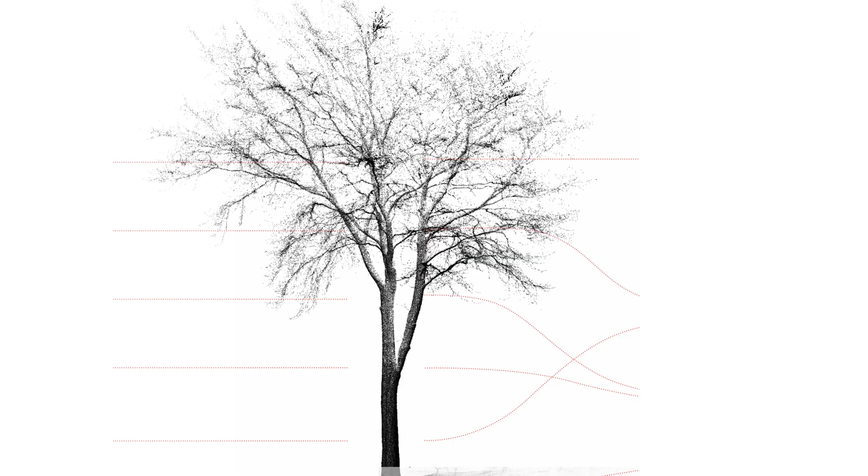There are two strands of research happening at Hooke Park. One is focusing on natural geometries. We're kind of in love with these really exciting curvatures and anomalies for timber production. Timber production doesn't know what to do with these fork geometries, but we know from an engineering point of view they're the strongest part of the tree.

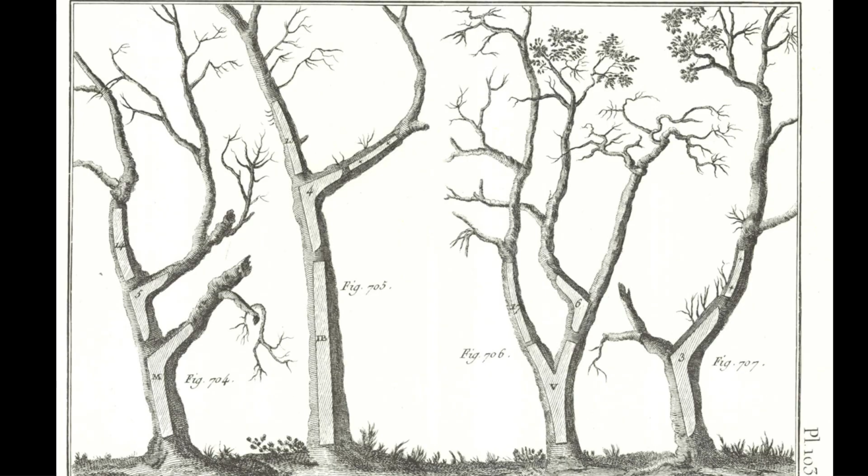This is not a practice that we invented. This is an image from an encyclopedia from 1700. Back in the days, people would go out with a jig and look for a specific bit of tree when they were building a boat, a house, or a cathedral.

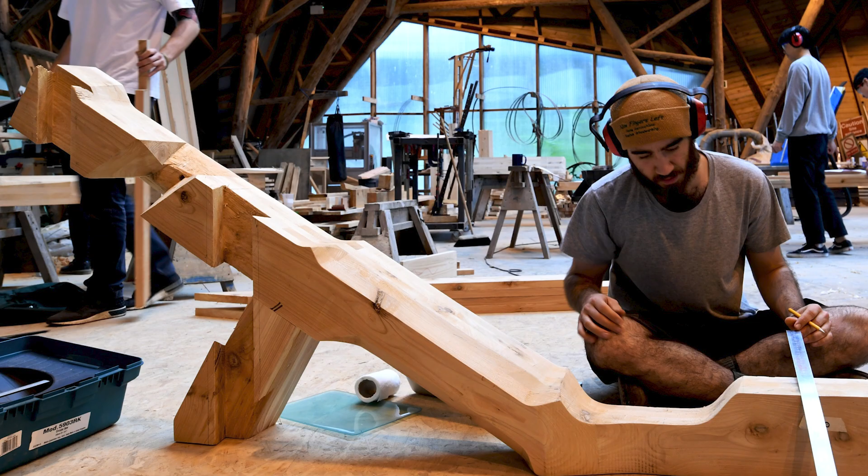Hooke Park is a laboratory, and we are interested in every part of the tree, from the root plates all the way to the crown timber, and we will find applications for that. This tacit engagement with the material is very important to get hands-on and actually learn from it, learn from its structure. We learn through making, we learn through physical production.

So one side is natural geometry, the other part is engineered timber. Practices like glulam and CLT, cross-laminated timber, mean that you can reconfigure the tree into a specific diagram that aligns with the forces that you need this piece to respond to. These are carefully choreographed recompositions of a tree, so we can make something which is stronger than the original tree.

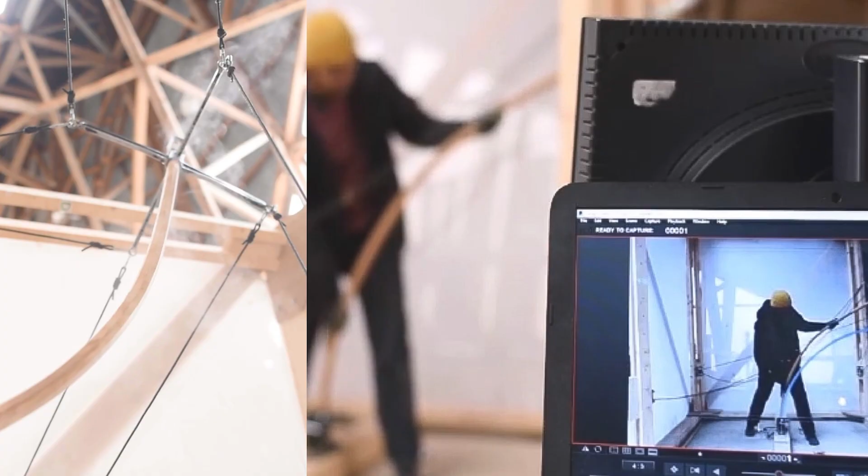We're interested in different ways that we can manipulate timber. This is steam bending, we can expose it to fire and heat to manipulate its shape. In this case, this is pretty much like drawing with timber, right? It's very refined, so you can kind of control its behavior.

Our toolbox is not really extensive, but scanning is very important, and I'm sure Thomas will point this out and you will have done exercises. Photogrammetry - really, this method is a connective tissue between the digital and the physical realm. It means that we can develop libraries of these natural geometries that we can then work with and develop.

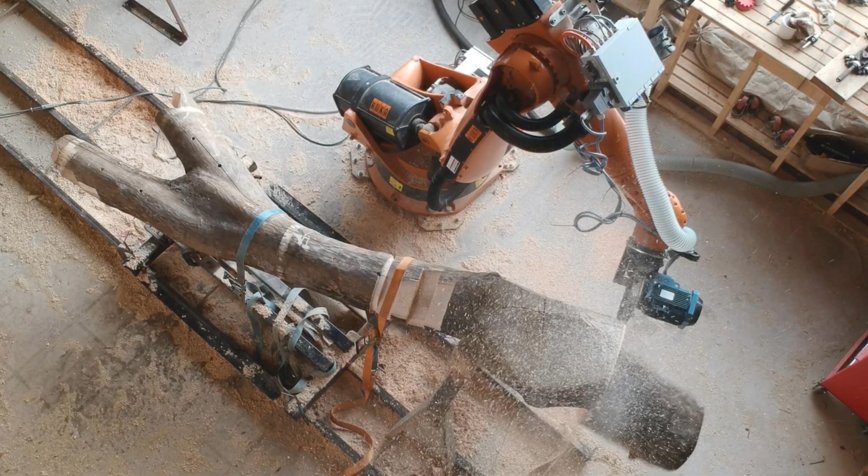The other bit of kit which is really important is this young lady - this is Latoya, the 6-axis robot. KRC2 C150, so she was born in 1996, very much last century, probably a lot older than you guys over there in the lecture hall. But she allows us to operate with surgical precision on the natural geometry, so she's very important.

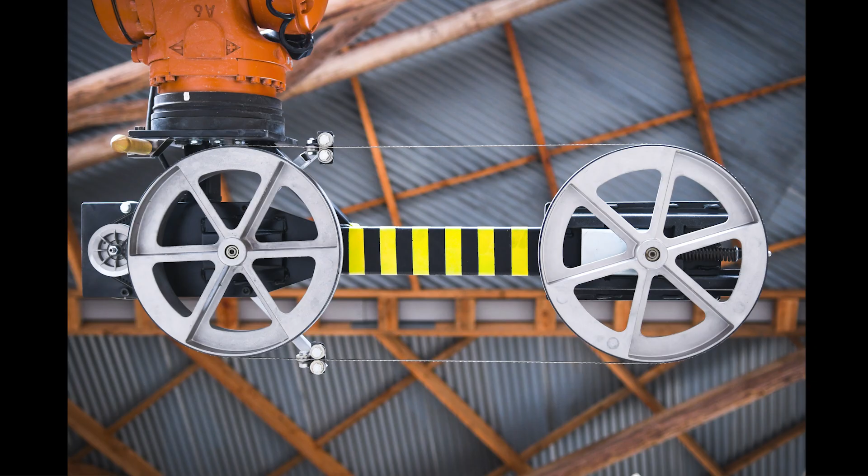The final piece which is really important for us is the ability to make our own tools. The bandsaw you are looking at is not something you can buy off the shelves. We buy bandsaws off eBay and we reconfigure them. This bandsaw is generation 2, and this is generation 3. We optimize and learn from the tool. This is pretty much the holy grail in the world of making and fabrication, if you can make your own tools.

It's a large part of my research to develop new robotic applications every year. This is by far the scariest tool we ever attached onto a robot - a circular saw that rotates at 25,000 revs, a pretty evil tool. But I try to develop a new one every year, and when we have a new tool, we try to get some bright minds from across the globe to come and play with it, and then we make little films like this to try and introduce people to it.

And what it allows us, sorry. I thought someone was saying something.

I like this image just because it really illustrates the juxtaposition between really precise junctions and connections and the power of leaving these natural geometries intact as much as we can. And it allows us to build crazy structures like this.

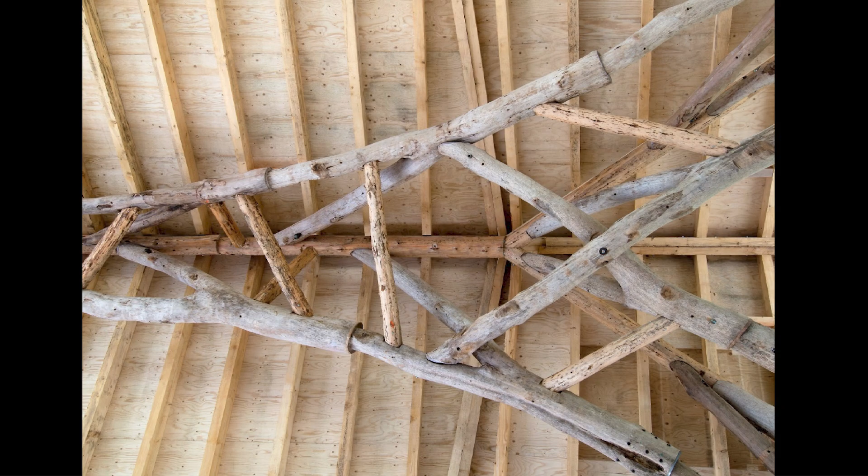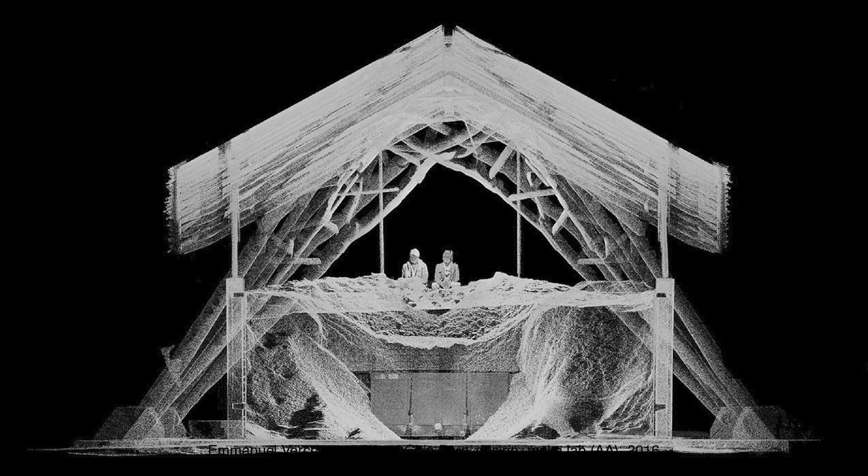And it's really important to understand why we do this. First of all, it reduces the embodied energy, right? We're just locally operating. But second, and this is probably more important, natural geometries for the same section are about 30% stronger, which means if you cut things into a dimension, like a square, you're actually reducing the strength of it. So these things are really important in the way that we work, where we try to work with the natural geometries as much as possible.

And this just really functions as a little demonstration that we work with all the parts of the tree. So when students join us, they don't necessarily have all the skill or the expertise to work with it. So we use these as kind of developing learning skills. So we gave the students this root plate and we taught a bit of robotics and a bit of CNC. And in the meantime, they made this lovely meeting table where the root plate is the structural system to the table, and there's some poetic notions of this island coming through the tabletop. It's a memory of the root plate.

And then the role of the drawing is really important. The role of the drawing to seduce you to go make. So it's really important to understand how much information do you need from a drawing before you need to hit the workshop. And the workshop is the place where we do all the work pretty much. 90% of the time we need to be in a workshop. And that's where we make all our discoveries.

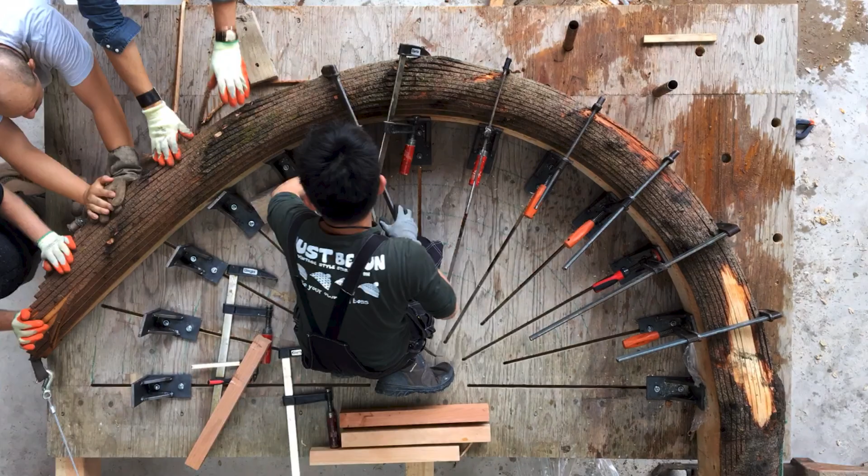And then this is Ankai. You probably have seen him in the earlier movie. We set Ankai the single challenge to steam bend an entire tree. And the reason why I focus on Ankai is because one of the key things that we do at Hooke Park, we ask our students what practice do they want to form when they finish, what knowledge are they after. So the great thing about Ankai is that he is still doing the same thing that he did with us 10 years ago. He's still steam bending entire trees, making these most beautiful constellations.

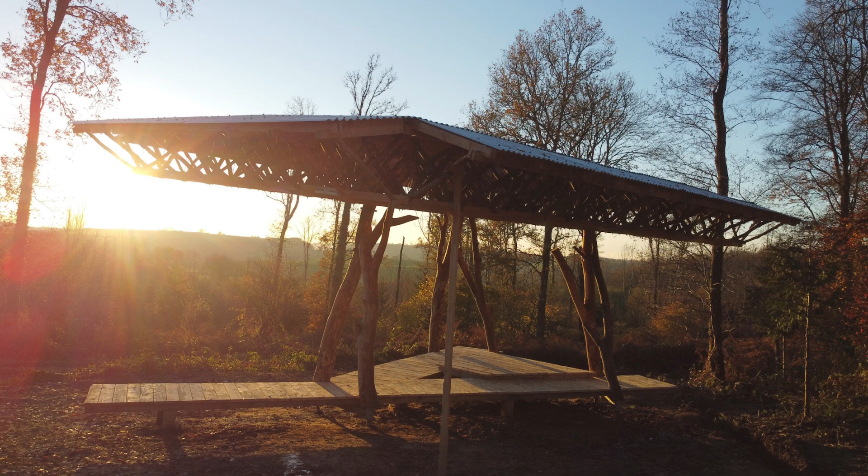I could go on showing work from Ankai, but I want to show you some demonstrations of these principles. So the first one I'm going to talk about is the process that surrounds the field station. So this is working with timber in the round, and then I will also show what we can do with engineered timber. So this is the field station. It sits at the edge of our forest, and it's in a really important location because it overlooks the Mapperton estate. And so this is its site.

And the story of the field station is related to the industrial harvesting process. So this is a very intelligent machine that roams our forest. It's an industrial harvester, cuts down a tree in less than a minute. So it will grab the tree, the chainsaw will cut it, it will flip it horizontally, and the head will cut off all the branches. As it does that, there are potentiometers in the head that are measuring the diameter, and on its way back, the algorithms, which are based on market information, have already decided the optimized length of this timber.

So it's quite a scary machine, highly automated, but this is what it leaves behind. So it's a bit of a war zone. There's lots of really amazing material which is discarded by the timber industry. So we challenge our students to work with this material. So here they are scavenging for material, and we decided to build a 100 square meter roof structure using this material. So this is the star of the show, this humble beech branch. It's 50 to 70 mil in diameter. No one's interested in this material as a structural component.

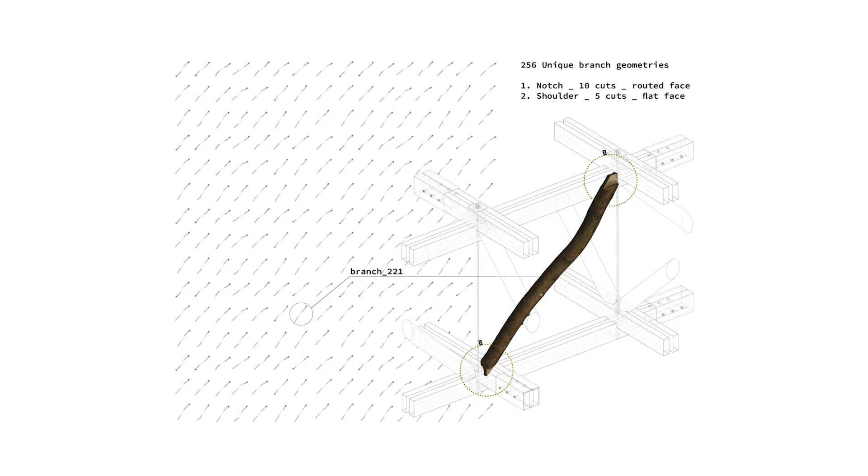So you see it here in the context. This piece is used in compression, so it's quite easy to detail. It just needs two tenons. And this is the global structure. So two frames of dimensional timber with the diagonals, which are the beech branches caught between, which provide a very stiffened truss frame. For us to be able to do that, we needed 256 of these components. For them to perform in a uniform manner, they all have to be the same length.

So this is the robotic application that we defined for this. We made a feeding station so we could put all the stock material, pass it on to Latoya from outside the cell. We gave Latoya one eye, which is a 3D camera, and we mounted the circular saw onto a lathe, as you do. And this is what it looks like in action. So the structured light is not a visual gizmo. It delivers a mesh from every individual branch that it scans. So we had to repeat this process 256 times.

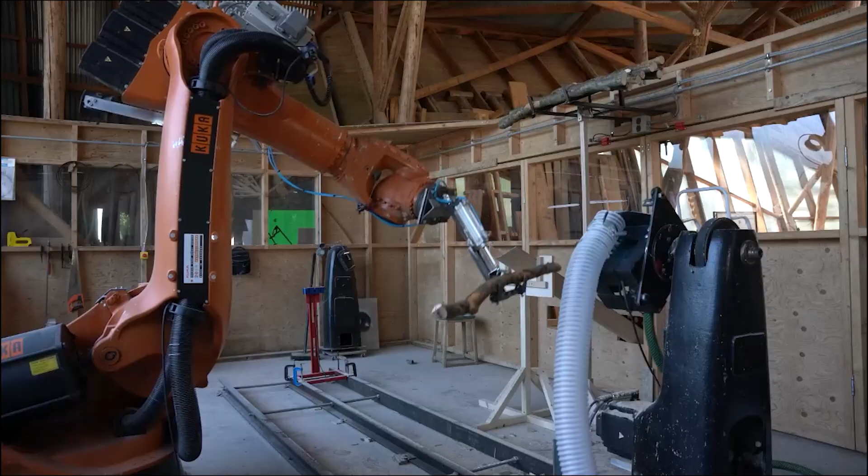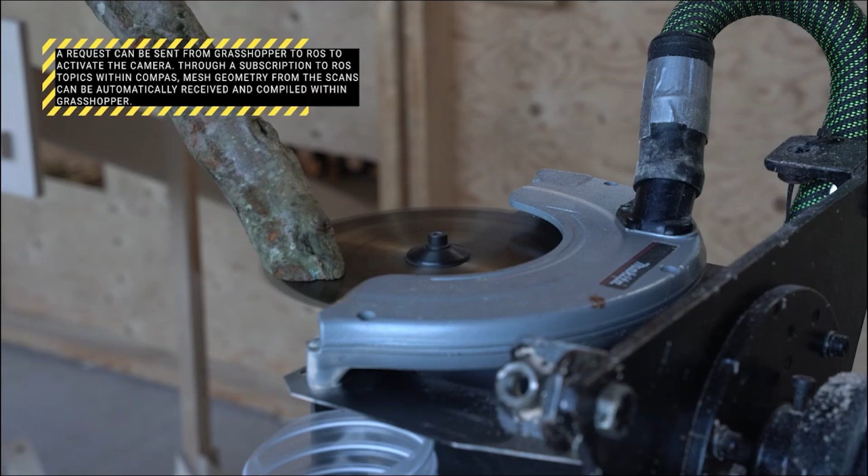So it took us about 2 months to develop this application. And we used dimensional timber to just calibrate the system, and we got the resolution below 0.5 millimeter, which is pretty crazy because this is green timber. But this film shows you the affordance of having an indexable blade because it really overrides many singularities or reach issues with the robot.

And then it took Latoya 6 minutes to make a single piece. And as you can tell, we made a hole in the door, we put a slide in, and every 6 minutes one of these components comes out of the door.

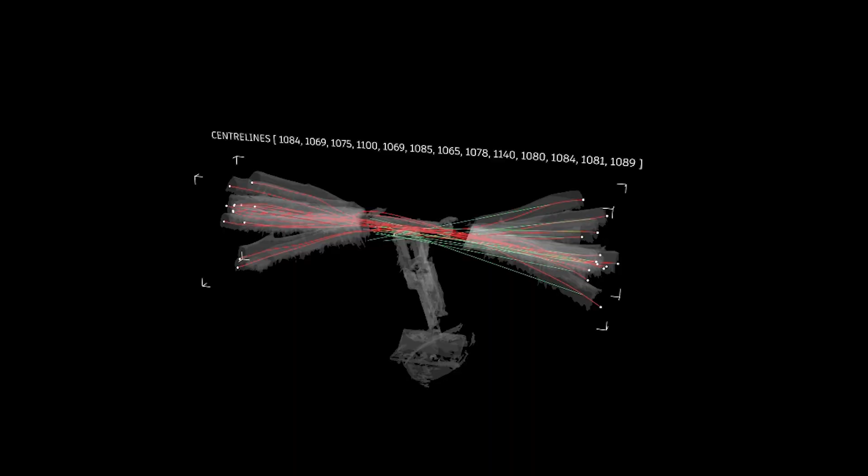And this shows you really the scripting process. So from a scan, we have a mesh, we can draw circles. If we can draw circles, we can connect center points. If we have a center point, we just need to move the tenon geometry onto that central line. So we have to do that for every single piece. And this lovely animation kind of shows you that workflow here. So every tool path was unique for every piece. We have data for every piece.

And the way that we work is really we learn through fabrication. We learn through making. So the first node I asked the students to make, I gave them some duct tape and some hot glue and some sticks, and they had 2 hours to make the first node. So that was generation 0, they called it, because it was very wonky. But by generation 7, we have a fully fleshed out building.

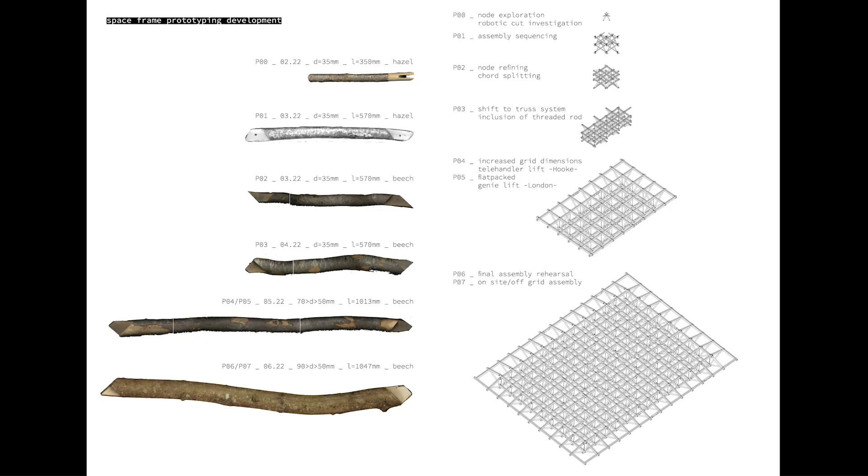So this is us doing a test assembly in our workshop. And these are all the components. So this whole structure is flat packable. So most of the components are interchangeable. There are no mechanical fixings. So we can take this apart and build this back up.

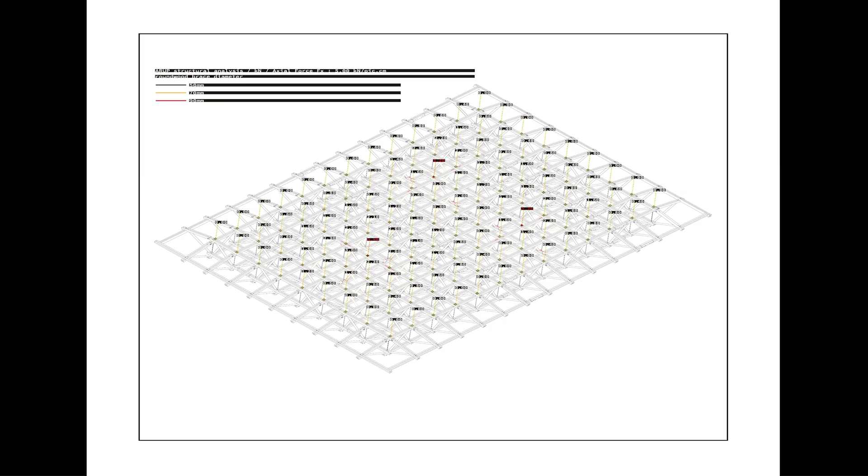We have a lovely relationship in kind with Arup. So they will help us with signing off our buildings and helping us calculate the structures, because all our buildings and all our structures need to meet building regulations and planning information. So all that needs to be provided. We don't pay them, but in return they come and play with us in the forest twice a year. But this is what they gave us for the field station. So every node is a threaded rod that needed tensioning to a fixed Newton value.

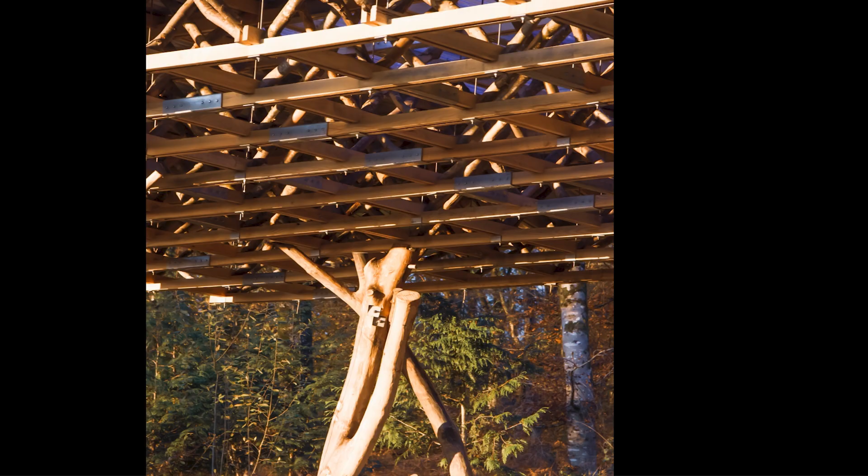And then this is the structure. I love this picture because it's got a memory of the crown of the timber of the forest. It's got a memory of the forest located essentially into the roof structure. So we spent 2 glorious weeks on site installing it, and this is how it looks like now. So that was working with natural geometries.

So I want to unpack the workflow for dimensional timber, and this is the skeleton that we built, primary structure, the superstructure for our large Wakeford Hall building that we are in the middle of building. So as you know by now, I will just show you the video.

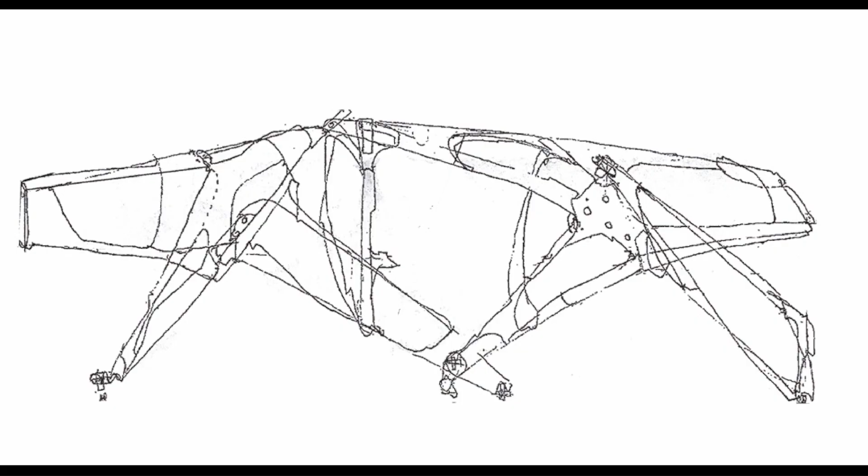Right, so the project pretty much always starts with a sketch. So for us, it's really important that we find a way to set constraints for the students to be able to get creative as quickly as possible. So this is one of the sketches that were issued. And together with the sketch was a brief that defined the workflow. So the workflow that the students had to use was glue lamination and CLT practices, and use Latoya with a bandsaw attached to it. Now this workflow is intentional because it was perfectly scalable.

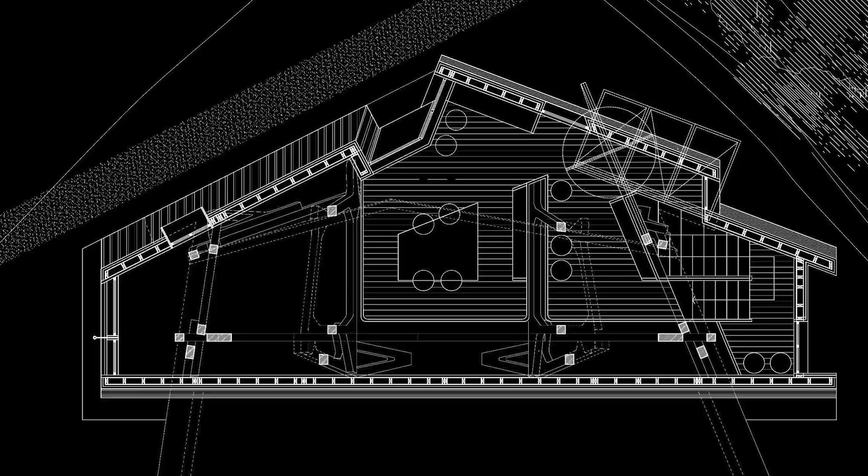So we operate as a practice. We have to go through planning permission, so we do have to produce the general arrangement, like plans and sections and elevations, which is the normal or comfortable terrain for the architect. But because we are also the fabricator, we produce information for production. And this is where it gets really exciting.

And then obviously we face the reality of machining this. So Latoya has a reach of 2.5 meters. Some of these components are in excess of 5 meters. So then the information that you need to draw looks a bit like this. And this is the choreography of the piece, so the rotation of the piece that's required for us to be able to cut all these different faces.

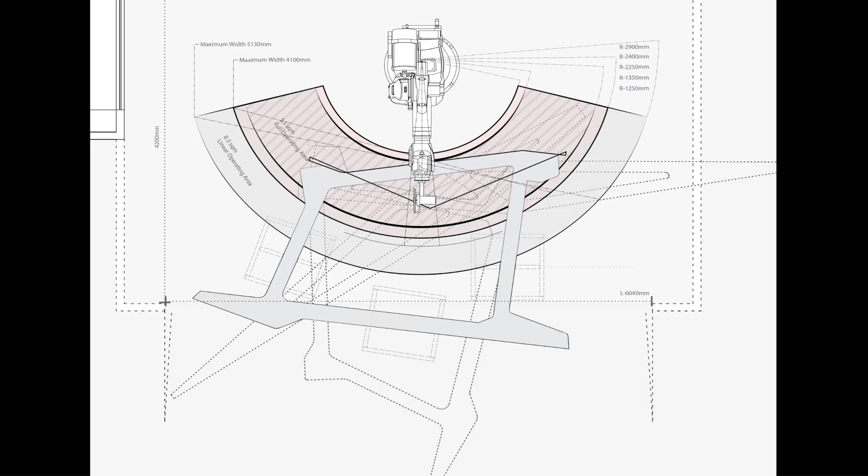So that's quite an important bit of information to produce and to test and to figure out before you actually start the construction. And then you still get into issues where you're trying to do this undercut and the robot's completely folded up. But anyway, we managed to produce these really large scale pieces.

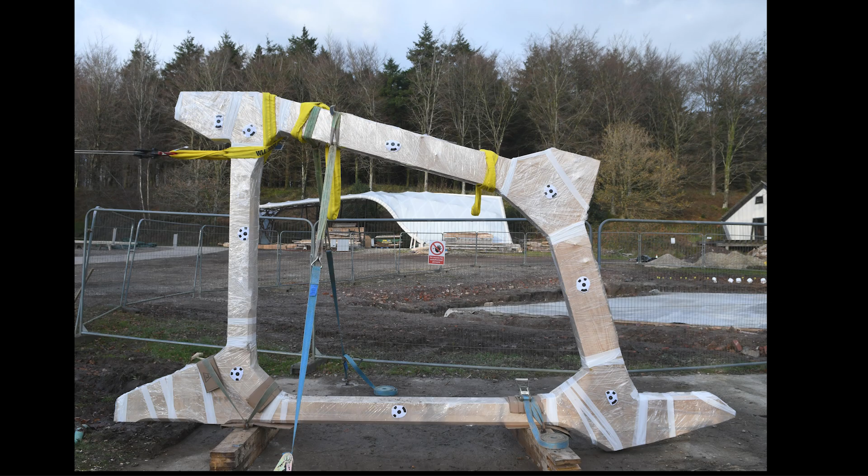So we bolt it to the ground, we put targets on, and we have a load cell in between this piece and the telehandler, so we can correlate the movement and the distortions in relationship to the force that's exhausting these pieces. And then we assemble and install it.

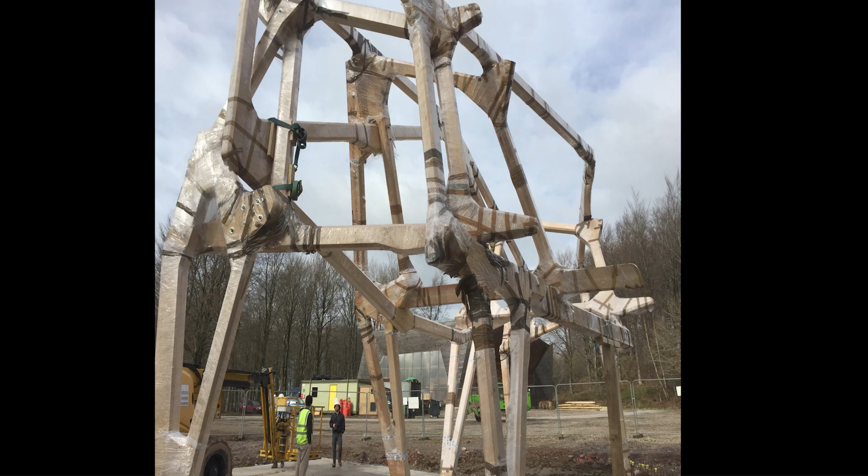So I'm sure you understand the complex relationship that timber has with moisture. So you can see this, we panicked a little bit, so we all jumped in the car, went to the co-op and bought up all the cling film. So we wrapped this entire piece in cling film to protect it from the weather, because we knew we wouldn't be able to build the skin for another 12 months, right?

And this is quite a complicated exercise. So one group of students build the primary structure, and the next students need to build the skin for this structure. So you can see the complexity of these nodes. Where do you start? And this is really where our scanning methodology comes back into play. We are not really that interested in the Rhino model. We are interested in information as built.

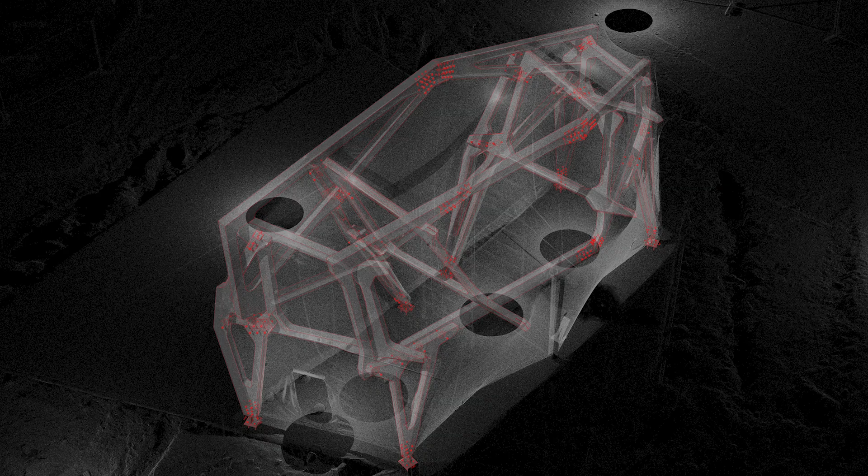So this is a really fascinating image where the Rhino model and the scan data is collapsed, so we can understand where the deviation is, where did we lose traction, where did we lose control, where did we make mistakes, how does the material behave. And then the second cohort, the students build the skin for it.

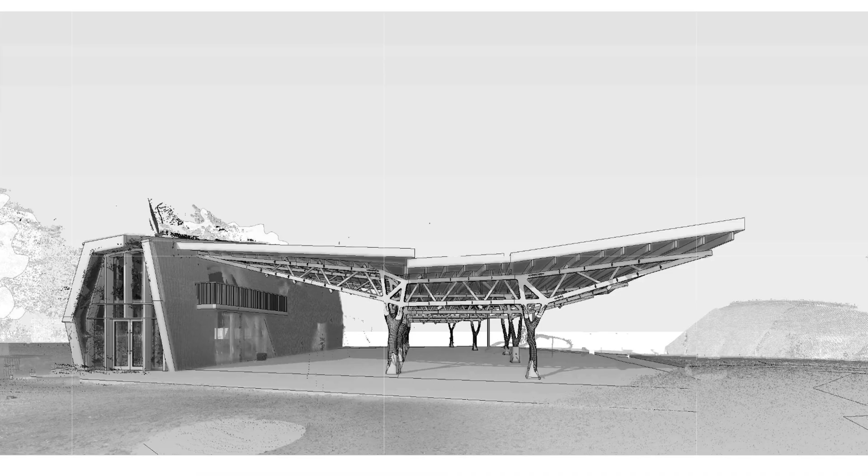But this is the phase that we developed for the last year and a half, which is called the tree and the truss. This is the third phase of a 5-phase building. So we will have a lecture hall and exhibition space underneath that. But the tree and the truss are the main components that the students of 2 generations ago built. And this is a hybrid structure, so as you can see in this image, combining natural geometry and engineered timber.

So it's a fallacy, this fantasy that architectural education creates, that you can spend 6 to 9 months within a design phase. So we need to move fast because we need to build this. So what we do within the course is we remove this idea of a simulation. We are actually going to build these structures. So let's have a look at this video.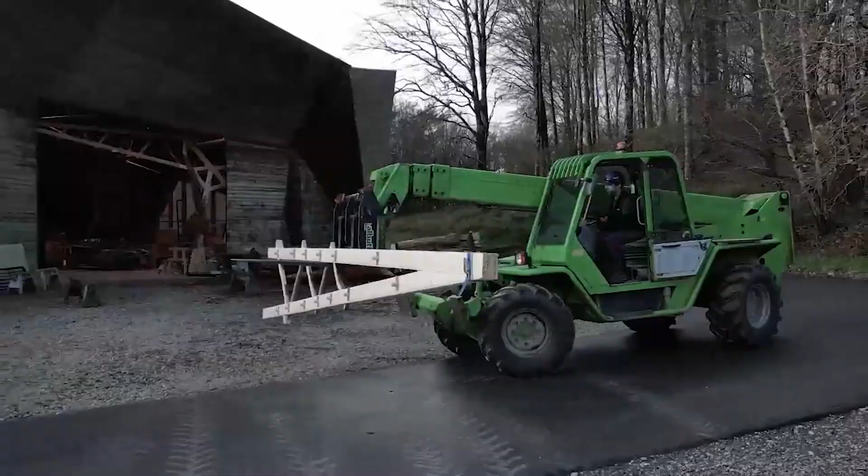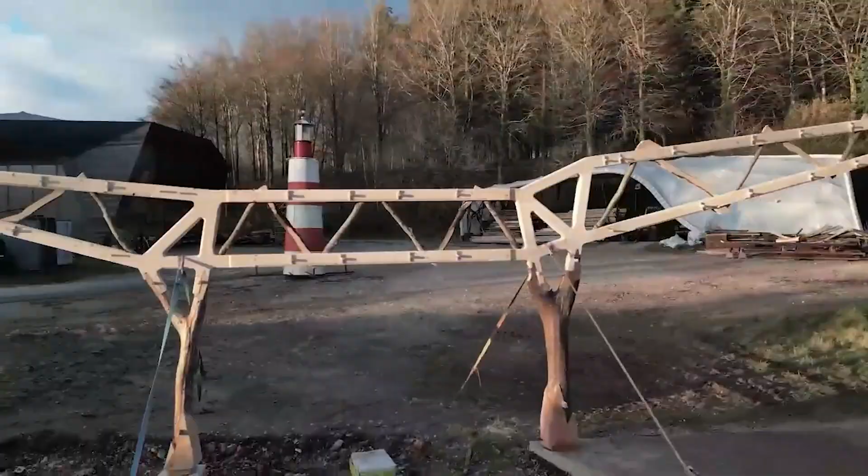Shortcut a minute, but I've still got quite a few things I want to show you. So this is quite an interesting display of all the different processes that are involved. So the blue bits and foundation, they are cedar, and then we use the natural tree as a column. So they all have these quite bespoke workflows to make these pieces.

So the first piece we will see, the robot used the industrial chainsaw to cut these faceted cedar pieces. Cedar is very good in wet or moist conditions, so this piece really protects the beech tree, which is a species which is very susceptible to moisture, so we have to protect it. This detail is really important because when we design, the most important question for us really is how do we assemble and how do we disassemble these structures.

So this entire project is 100% timber, and it doesn't use any mechanical fixings. So you can take this whole structure apart just with a mallet, with a hammer. So everything is tensioned together with these wedges. So it's really important. We don't believe that the wrecking ball is the answer to take our buildings apart. So these wedges, if you need more tension, you just hammer the wedge a bit deeper. If it's cracking, you need to release it, you just reverse it. So if a component fails, we can just prop the building and replace every component very, very simply.

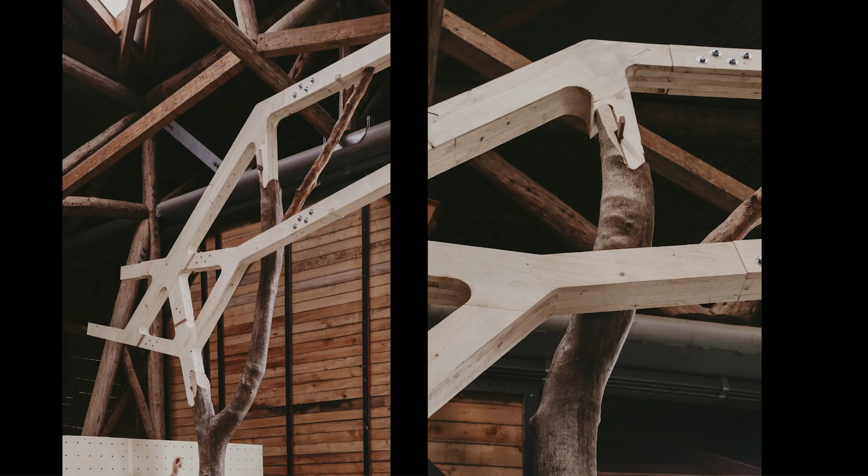So then we use 10 trees, and every tree is unique. So 10 natural forking trees, which means we have to make a bespoke bit of glulam for every tree. So every piece is unique to the tree. So again, we use the chainsaw to cut these geometries. And then we make quite a straightforward truss. And I hope you will have spotted that there's quite a bit of repeated methods and workflow. So we're really keen on producing cumulative research. So we keep building upon the research.

Now, if you understand how a truss works from an engineering point of view, your first diagonal will be in compression, and then the next one needs to be in tension. So this is our tension web. Timber in tension is very strong. The problem is always how do you hold on to it? Because as soon as you drill into it, or if you remove material, you make it weaker. So our solution here was to curve cut it, steam bend it, and introduce these wedges. So then we could hold on to it just through its altered geometry.

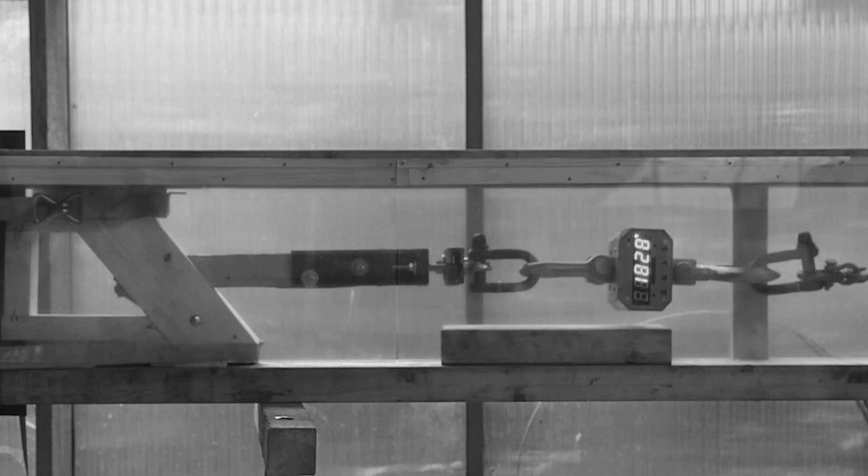And as usual, there's very few or no precedents for this. So we have to develop our own structural tests because Arup said this humble bit of timber needs to withstand 4 tons of tensile force, which is enormous, really. So you can see, if you look at the reader, at about 3 tons, the grain is collapsing and we are pulling this geometry through. And this is because the splayed geometry, the tension web, is beech, which is a hardwood, but the dimensional timber of the truss is spruce, which is a softwood, so the fiber would just collapse.

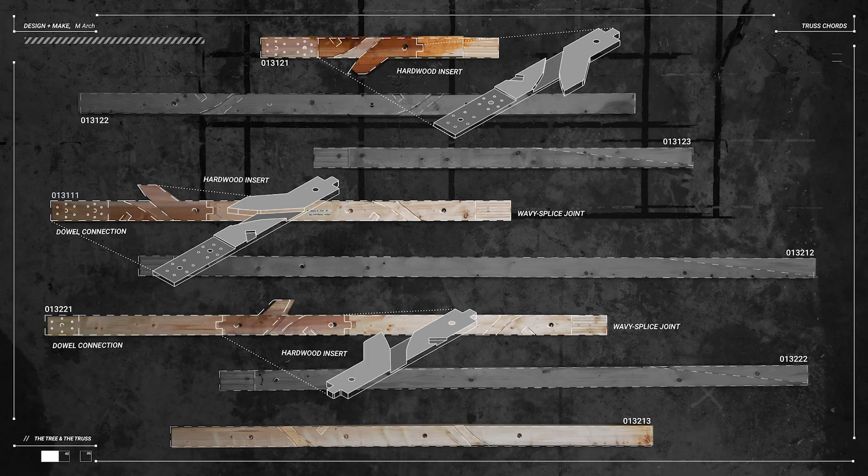So this is a design opportunity for us. So what we did is we made a little pocket and we inserted like a prosthetic bit of hardwood that would deal with the forces just locally. And that solved the problem when we got to the required newtons that Arup were after, so we could carry on assembling and producing. So we just made 5 of these trusses, and we hope to install them after the new year, which is pretty exciting. And these are the gangsters that we did it with. These lovely people spent about 12 months building and developing this work for all these structures.

I want to end with showing you the Forest Datum, which is the project that we finished last year. And this is a really important project. For us, it changes a lot of things. As usual, I will just start with the video and then we can unpack the process. Before the video, I want to show you this, which is a little sketch. So every project starts with a visual illustration of where we're going, what we're trying to do. So we're trying to use as much of the crown wood as possible, use the whole tree. This was the mission. And this is the video.

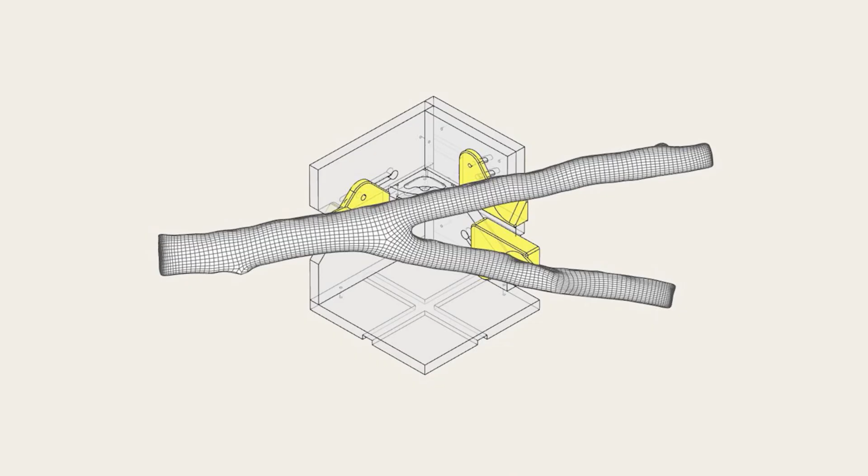And from a structural logic, we are always looking for this simple basic cell. So this is the basic cell, the basic bounding box that we put our juvenile timbers into, and then we reduce it to XYZ values that are all the same. So what's important within this project is that all the intelligence resides within the jig. So it no longer requires a 6-axis robotic system. So we are really interested in working with local communities, because the only thing we need to make the structure is this jig and a bandsaw, which changes things, right?

And the structural logic is such that these geometries are too small. You can't cut any timber joints in there, any kind of lap joints or scarf joints or mortise and tenons. There is just not enough material. So they have to rest against each other in compression. And then we get a bit of dimensional timber to hold all these pieces in place.

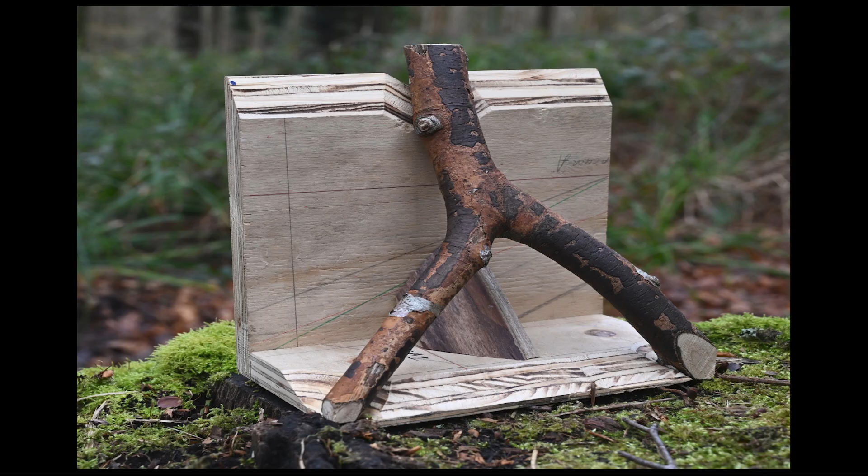And again, we learn through making. This is the very first jig, right? So we set these principles out, and then the very first jig takes about 2 hours to make. And this is the final jig, right, which has been optimized. It's quite an intelligent little piece with lots of 3D printed components. Now, it's important to understand that these 3D printed components do not alter the geometry. They are there to support the timber, because we have to avoid any kind of vibration or moving when this piece is being cut. So that's the supporting role of the 3D printed components.

And then we are really interested in the morphology of a tree. Every tree branches differently. And as a designer, we want the material to lead, so we take a step back. So when we did a scan of a beech tree, we are running an analysis, and we are looking for the most common geometries, so the most appearing angle and fork geometry. And that determines our X, Y, Z of our jig. So we're trying to let the material take all the decisions. And this is really a pleasant way of working as a designer, because we are just following the material lead.

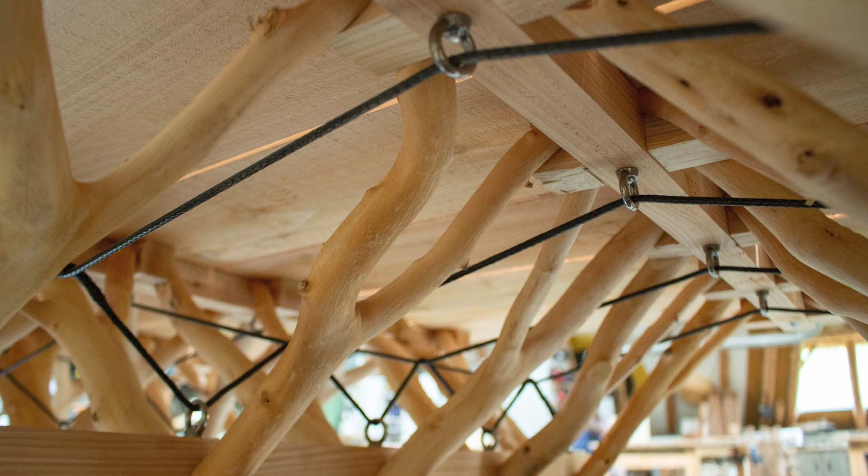So here they are, all rolling into this configuration. And then we use a bit of Dyneema rope, which is 10 times stronger than steel, to bring all of this geometry into tension. So you can see this as a pre-tension component, like you would have in pre-stressed concrete. So we could turn this into a banana if we want to anticipate a potential load case.

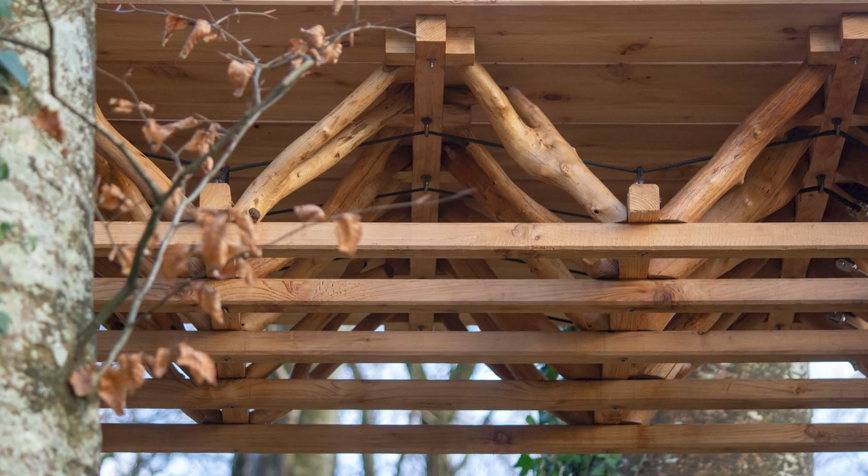So here are some images of it on site. The timber that we used for this is beech. So the stupidest thing you could do is put it outside in Dorset, because beech is so susceptible to moisture. But we are a laboratory, and we are interested in failure. So we want to see how this piece behaves. And the interesting thing is these branches take about 3 to 5 years to grow. So if we could make this structure last 3 to 5 years, then we have a perfect circle. And this connects with pedagogical concepts, like the Ise Temple in Japan, that they rebuild every 20 years. So I'm very happy to rebuild this structure, take out the soft tissue of these branches, and teach another cohort how to construct this piece.

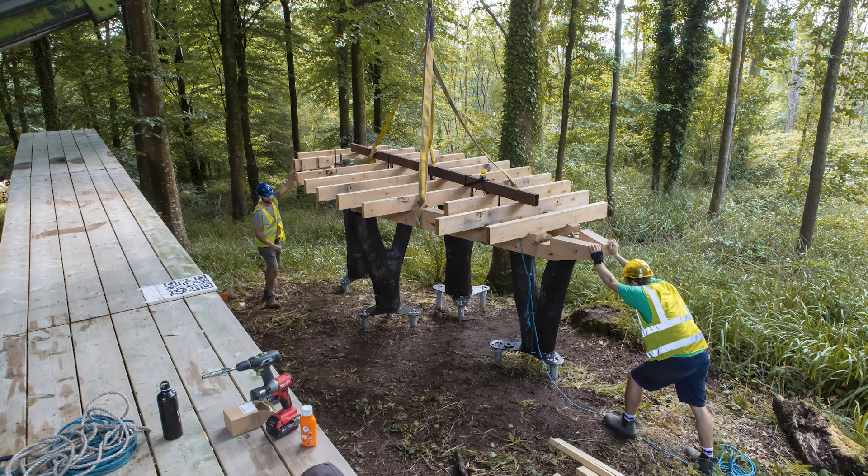So you can see the idea is not that you jump, but the platform on the right hand side will provide 2 showers with a beautiful forest view. To get to the showers, there are 2 drawbridges, and we're interested in this state change. So you walk across the drawbridge, and when you're in the shower, you pull up the drawbridge and it becomes a door that disconnects it from the jetty. That gives you privacy. So this is where these last projects reside.

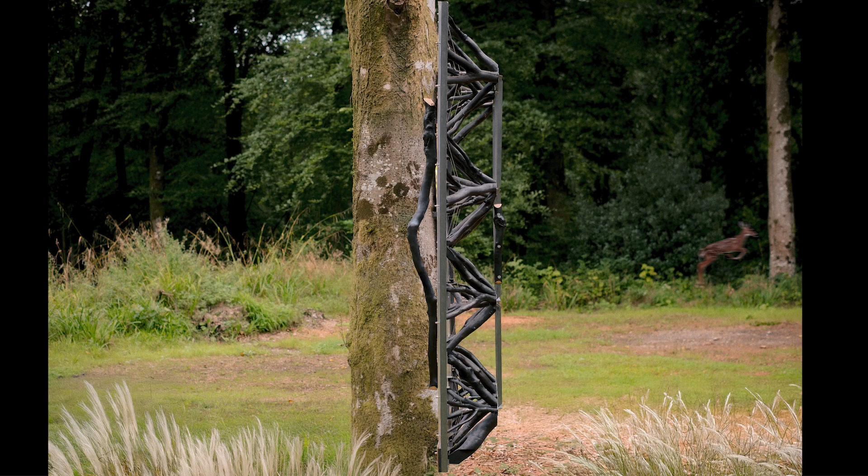And as I mentioned, we're really interested in accumulative research and pushing the boundaries. So if the datum was a horizontal structure, we questioned our students, how does this behave vertically? So this is Luxai's work, looking at a facade system with exactly the same forks, exactly the same jig used to cut it. But because of the inverted force relationship, there's quite a bit of metal in there, but it's quite a beautiful, elegant system.